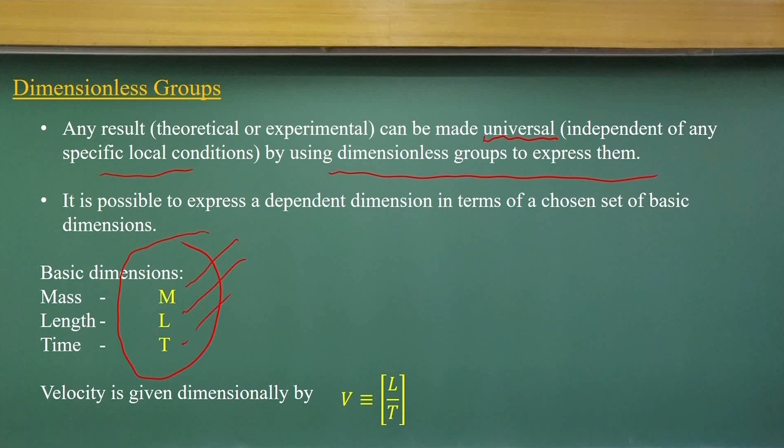Now if you look at the fluid properties, some are related purely to geometric dimensions - length, area and volume. It is just a geometric dimension, so it has units only in terms of length: length is L, area is L square, and volume is L to the power 3. Similarly, velocity is length per unit time, and acceleration follows a similar logic. Let me look at discharge or volumetric flow rate - volume per unit time - that would be L cubed divided by T, which is the volumetric flow rate.

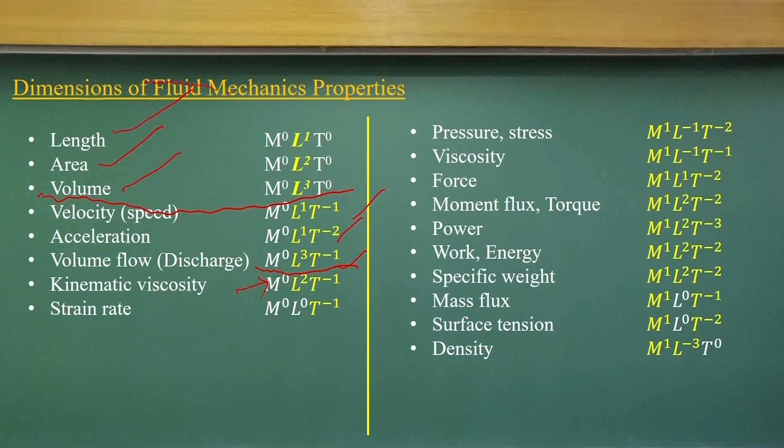Now we come to two different parts. One is kinematic viscosity, as we discussed in Newton's laws of viscosity, which is independent of mass - it has dimensions of length and time. Similarly, the shear strain rate is also independent of mass and length. So if you look at these properties, all are independent of mass. First I start from length, area, volume, then fluid properties like velocity, acceleration, volumetric rate or discharge, kinematic viscosity, and the shear strain rate.

Now look at other properties like pressure, force per unit area, similarly shear force per unit area. Force, as you know, will be mass into acceleration. The pressure and shear will be force per unit area, that is what you can compute.

Similarly you can compute the viscosity dimensions if you know the basic equation of Newton's laws of viscosity. Shear stress is proportional to shear strain rate, and the proportionality constant is the viscosity. So you can compute what could be the dimensions of viscosity.

Similarly, let us move to the next level with momentum flux or torque, and the units for power, work and energy - you can find out what they will be. Then I come to two other properties: specific weight and mass flux, which is mass per unit time.

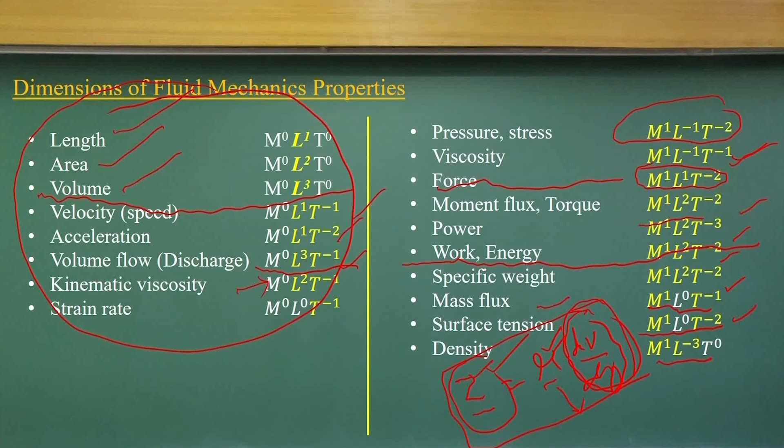If you can get that, substitute the dimensions of the properties like shear stress, velocity gradient and the mu value, then you can get the dimensions of mu. And if you know the relationship between kinematic viscosity and dynamic viscosity, or the basic relationships between fluid properties, you can compute the dimensions of those fluid properties.

So whenever you have problems, first write the dimensions of the fluid properties, and if you know the dimensions, you can easily find the units - for example in terms of kg per meter cube. Mass will be in kg, length in meters or centimeters, and time in seconds, hours, or days - we can have different time frames. So it's a very easy task to derive the dimensions of fluid mechanics properties.

Let us go to the principle of homogeneity. Most equations in engineering - not all, let me repeat, most equations in engineering - are dimensionally homogeneous. That means the dimensions of the equation will be the same on both sides. The left hand side dimensions should match the right hand side dimensions for the equation to be dimensionally homogeneous. This concept of dimensional homogeneity is something we use for designing experiments.

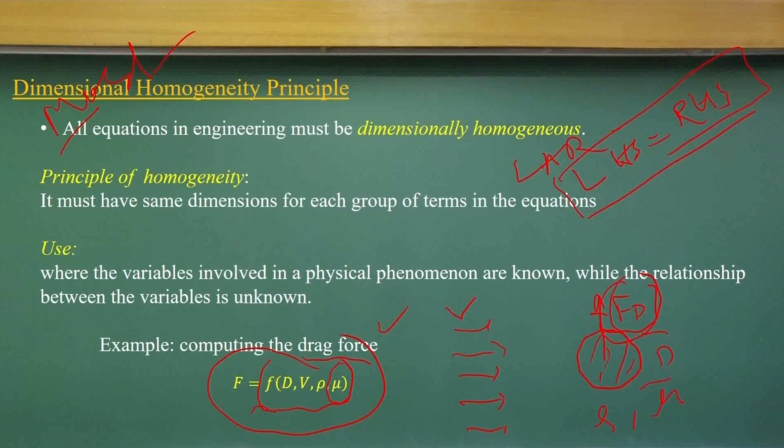How will we do it? There are two ways. First, since F is a function of 4 independent variables, I will do 4 types of experiments. When conducting an experiment, changing D and different V1, V2, V3, I keep rho and mu constant. Similarly, I will change the other parameters, keeping the rest constant.

If I try to get a function this way, I will fix 2 parameters and run a series of experiments, say 10 experiments, to get a curve. For the conditions with independent variables, I will need 10 into 10 into 10 into 10, which comes out to be 10000 experiments.

If it is 10000 experiments, that is too expensive for us. But what we have to look at is whether there is some sort of dimensional relationship between these independent variables and the dependent variable. If they have a dimensional relationship that we can find, we need not do these 10000 experiments; we can do fewer.

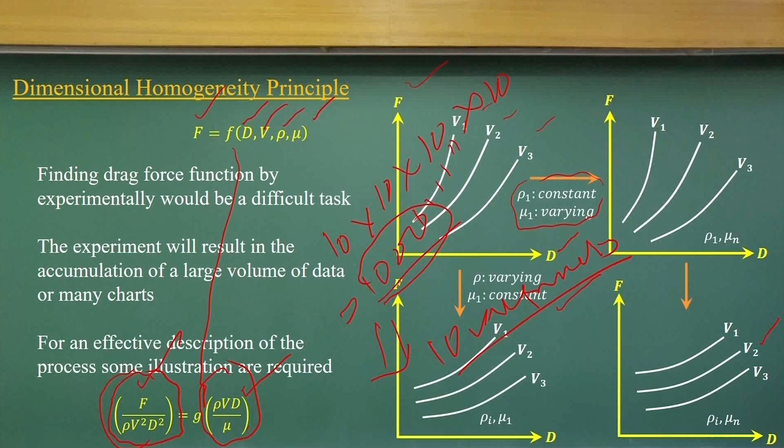So instead of the F function, we are now looking at a g function, a relationship between two non-dimensional groups, one on the left side and one on the right, and we look at different functions. If that is the condition, I should conduct experiments at different Reynolds numbers and get from the experiment what the force will be, non-dimensionalize it as an f1 function, fit a function, and get this data. So only 10 experiments are enough.

As compared to conducting 10000 experiments, the non-dimensional approach lets us make a dimensionless force plot and conduct experiments at different Reynolds numbers. Once you run experiments at different Reynolds numbers, you get the force, you know the velocity, you know the diameter of the cylinder, then you can compute the non-dimensional force component. If you get this curve, it is easy to find the force at different Reynolds numbers. So this dimensionless analysis saves us from doing a large number of experiments.

Second, when you put it in non-dimensional form, it is easy to interpret the data as compared to doing it on an individual basis.

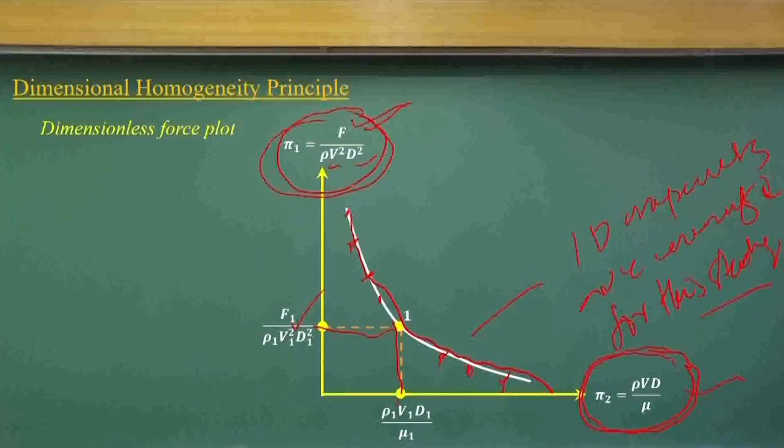The dimensionless plot and this analysis help us save a large number of experiments, as well as help us interpret data in a better way compared to doing individual experiments. Almost all the time, any experimentalist starts designing experiments using dimensional analysis.

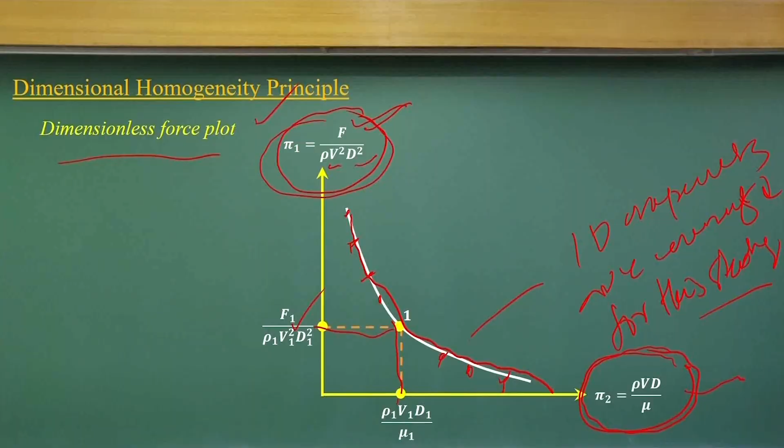It is not only fluid mechanics, but economic models and socio-economic models as well. If you talk about any experiment you conduct, we always do a dimensional analysis to find out how many experiments we should conduct.

Now let us come to how to do that - Buckingham's pi theorem, which is a very simple concept. If you have a number of independent dimensionless groups, how many will I get? If there are n dependent variables, and we know the basic dimensions are 3 - mass, length and time - then we can group it so that the number of non-dimensional groups will be n minus r.

Please remember, the dimensions are usually 3, but not always 3. That is something I want to highlight again - you have to use judgment for that.

If you know that a particular dependent variable has these many associated variables, and if you can visualize what force components and variables are going to play a role, then you do a non-dimensional analysis to find the relationship between dependent and independent variables.

Now let us come to the same problem - drag force on a sphere. It's easy now, same concept in fluid streams, same problem. You have a sphere here, and the flow is coming here like a cricket ball.

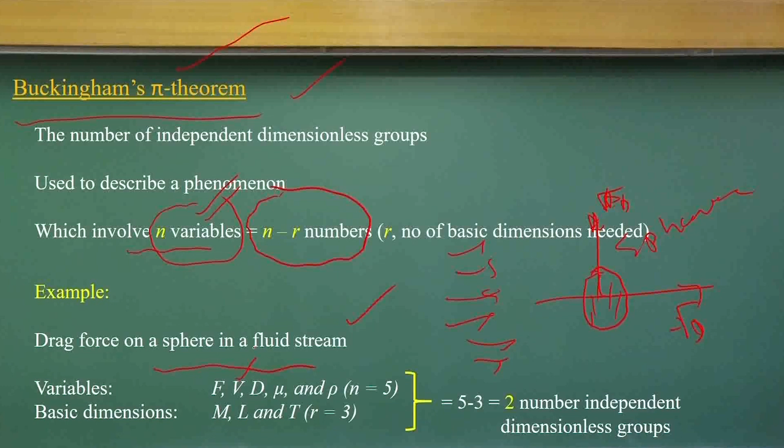If that is the condition, I can visualize that it has a dependency on velocity, the dimensions of this, the diameter of the sphere, and the fluid properties like mu and rho.

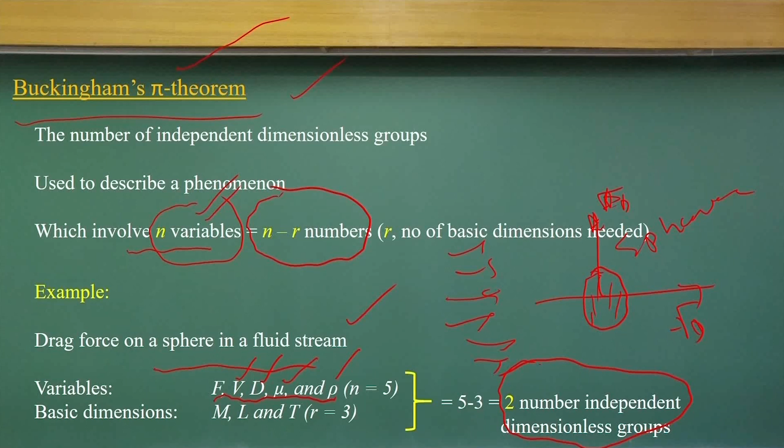So the total number of dependent and independent variables is 5, and basic dimensions are 3. So we can make 2 independent dimensionless groups. Is that correct? It's very easy - we have to find the dependent and independent variables, count them, and since we know the basic dimensions are 3 (mass, length and time), we just subtract to find that we can have 2 independent dimensional groups.

Now I have to develop the dimensional groups. So first, what I have to do is write the dimensions of each one: force, mass into acceleration, the length, velocity, density and dynamic viscosity.

If you do not remember the dimensions of dynamic viscosity, please remember Newton's law of viscosity - you have to remember that one. If you do not remember the dimensions of dynamic viscosity, please remember Newton's law of viscosity. If you remember it, you can easily compute the mu dimensions. That is what always confuses people in any exam.

I want to give you a way to remember all the dimensions of the fluid properties - if you know the basic equations, some of the basic equations, you can easily find out the dimensions of that dependent or independent variable.

Now, if you look at that, this is called the pi theorem. It's a very easy concept - please don't confuse the pi here with pi equals 3.14. That is not it - it's a non-dimensional form, pi.

So for this, I can have 3 variables - that's length, velocity, and rho, and force. These are called the repeating variables. Length, velocity and density - I will put these as repeating variables along with F.

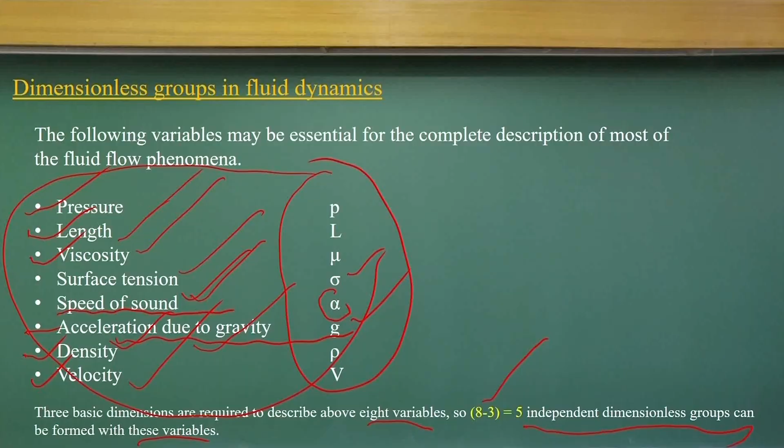Most fluid flow problems - nowadays you do it in very extensive different ways - but most fluid flow problems we can define with these 8 variables. That means we can group them into 5 independent dimensional groups. So what are they? Now I can show you the figures.

I do believe these figures will convey many things which I may not express within this limited time. If you look at what happens when we have fluid flows, different forces act, and different forces dominate under different conditions. When you solve fluid flow problems, we should find out which force is dominant and try to solve for the dominant case.

So that is the way we look at fluid flow problems - to judge which forces are dominating. For example, when you have laminar to turbulent flow, like this case - you can see this laminar to turbulent flow which I discussed in the first class, showing vortex shedding and all - these are the forces that are dominated here.

One is the inertia force, the momentum flux, and another is the viscous component. These two forces are dominated, and the ratio of those two forces is the Reynolds number. You can compute this as rho VL by mu. I'm leaving you to do that exercise, otherwise we will discuss it in your assignment.

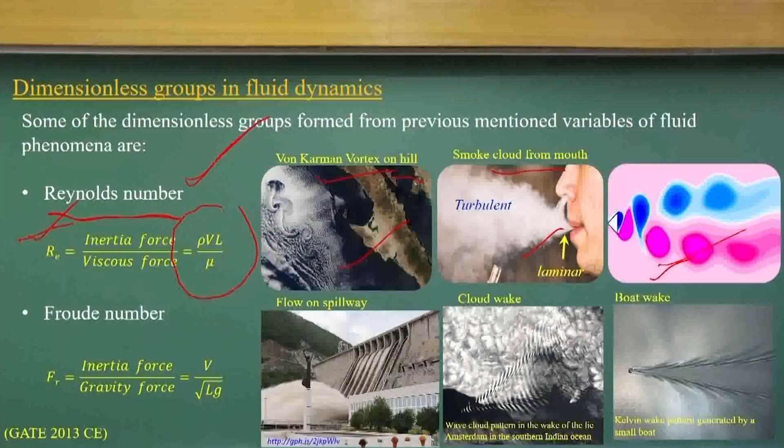In a similar way, if you go for the next number, it's called the Froude number. It depends on the fluid flow where gravity force also has dominancy compared to viscous force. For example, if you talk about this spillway, here the viscous forces are not that dominant; the gravity force works dominant at sea level. So we can have a ratio between inertia force and gravity force. That's what flow Froude number is. That's how we define it, as a non-dimensional form.

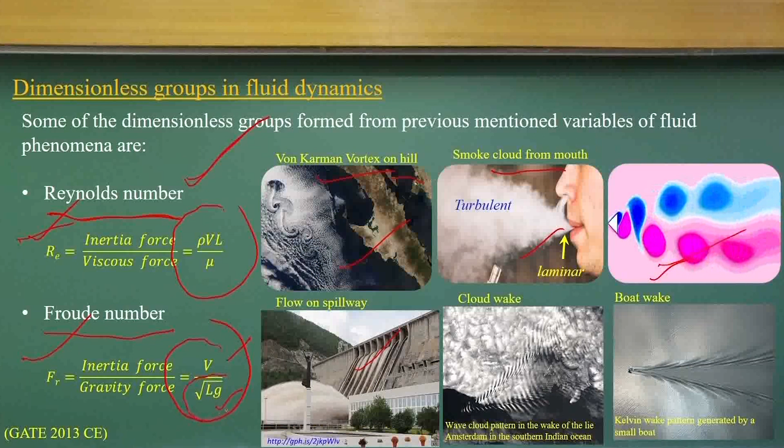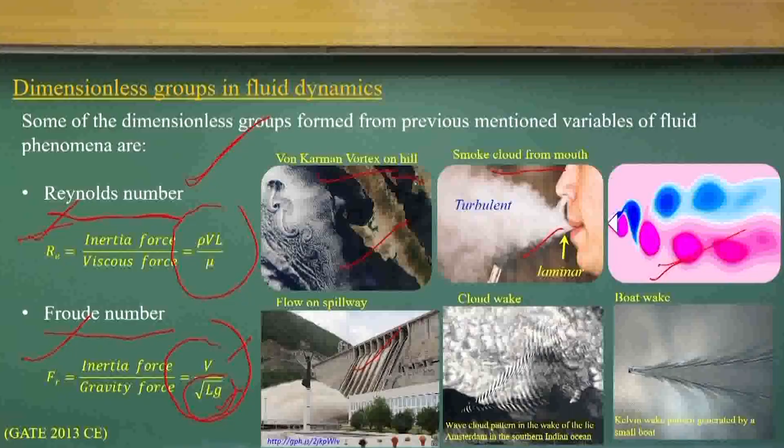If you look at this, it's velocity over length into g, square root, also having the unit dimensions of velocity, so it becomes non-dimensional. How to get this component, I think in these basic lectures I cannot fully complete the wave celerity concept here, but I will cover it in higher classes. If you go for postgraduate studies or open channel flow, definitely you'll know how this square root of Lg comes as a gravity force component.

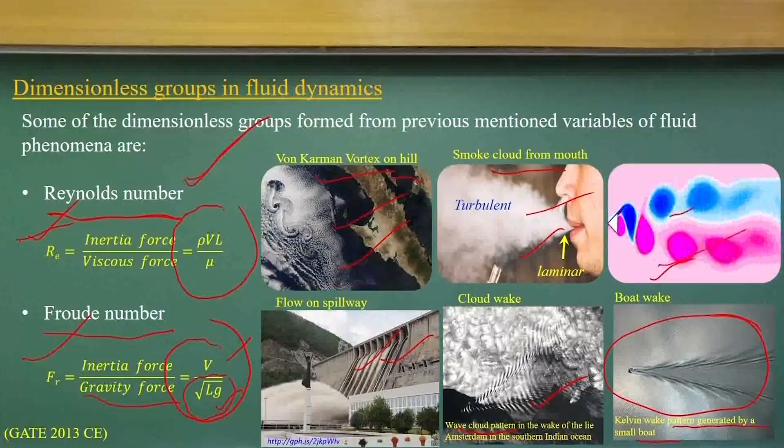The same process happens with wave cloud patterns, and also in the wave pattern generated by a small boat. You can look at these figures; it's very interesting, you can see all sorts of flow dominancy. The top lines show flow dominancy of inertia force, which drives the flow, versus viscous force; in this case, inertia force versus gravity force. I just repeat, please remember these two numbers because they are very common: Reynolds number and flow Froude number.

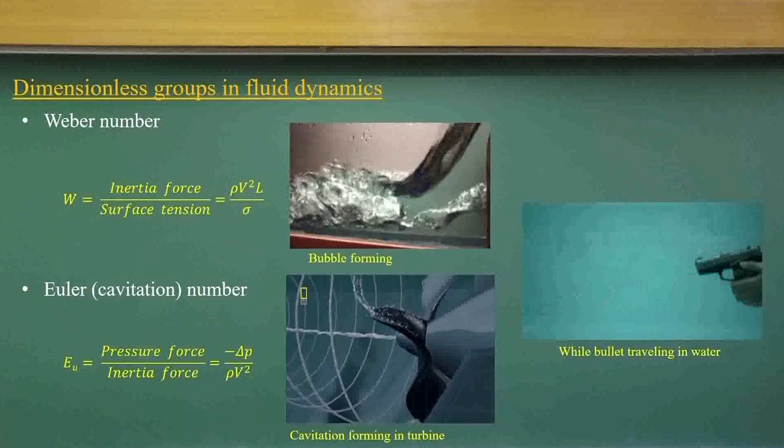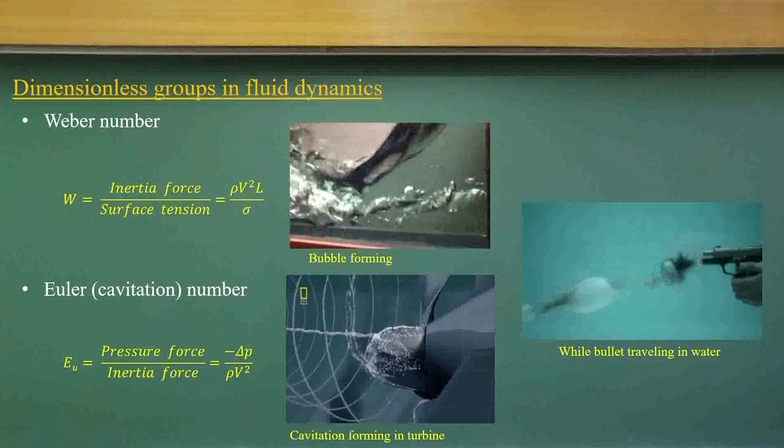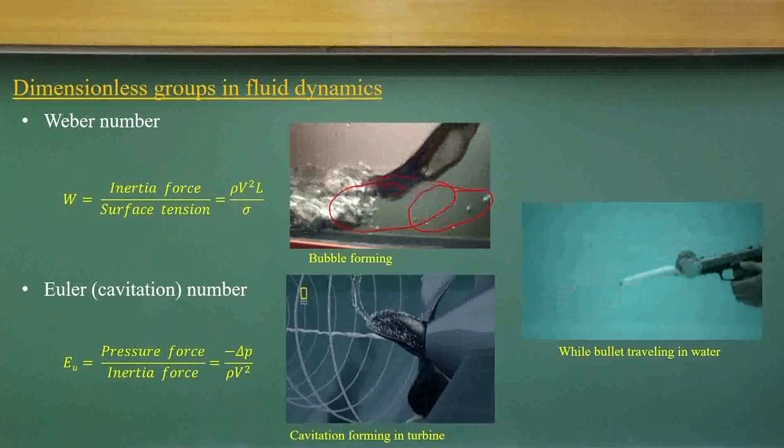Now if you look at the other two numbers, not used as often, but nowadays at the level of fluid mechanics problems we are solving, we look at these forms too. One is where surface tension dominancy is there, like these bubble formations, which are because of surface tension force. So if I focus on these bubble formations, I should look at the Weber number, which represents a ratio between inertia force and surface tension force. That's the component we are getting.

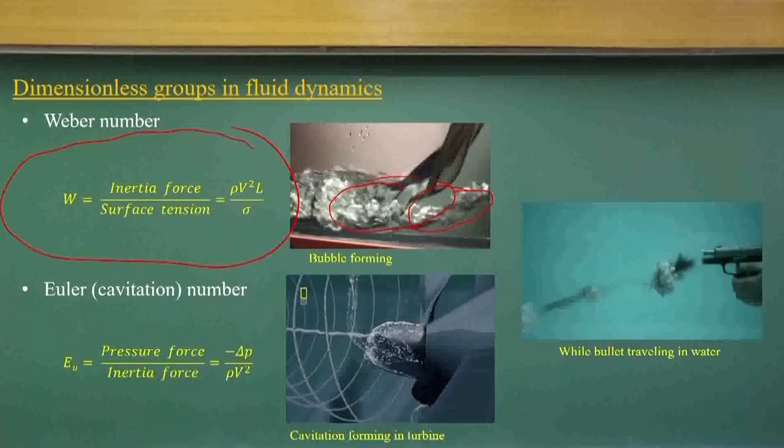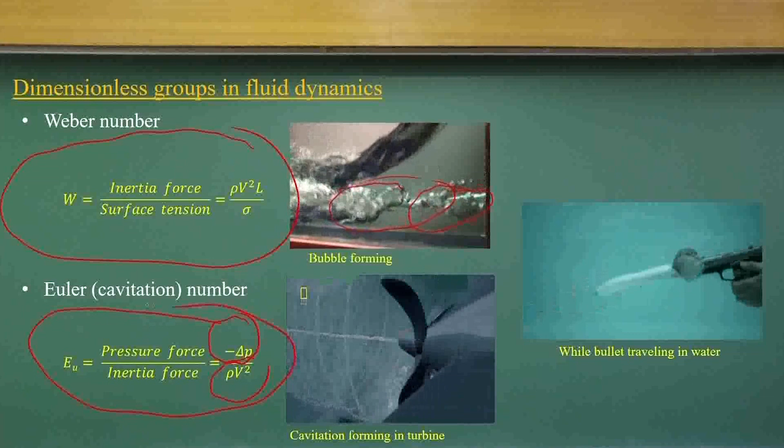But you know, cavitation occurs when the pressure drops to certain levels, then water vapor forms, which we discussed in the basic lecture 2. So what happens is we try to look at how much pressure drops, which generates the cavitation process. Pressure drops, the change in pressure—if there's more change in pressure, there is a greater likelihood of cavitation force, divided by the inertia forces, which is defined as Euler number or cavitation number. In this Euler number, the inertia force is in the denominator, as compared to the other numbers.

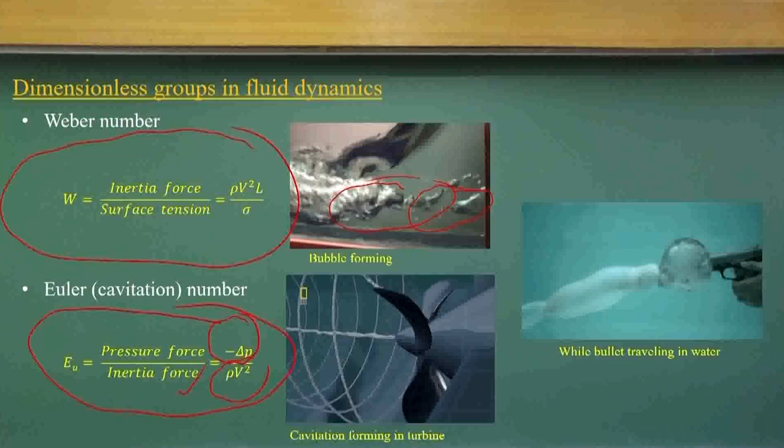So we have four numbers with us: Reynolds number, flow Froude number, Weber number, and Euler number or cavitation number, which happens when a turbine is moving. We can see there is a chance of cavitation formation near the turbine blade. But there are conditions where both things are dominant, like surface tension and cavitation, which happens. It's a very interesting topic: if a bullet travels in water, surface tension as well as pressure drops create the cavitation process. We can see bubble formations and also the collapsing of bubbles as the bullet travels.

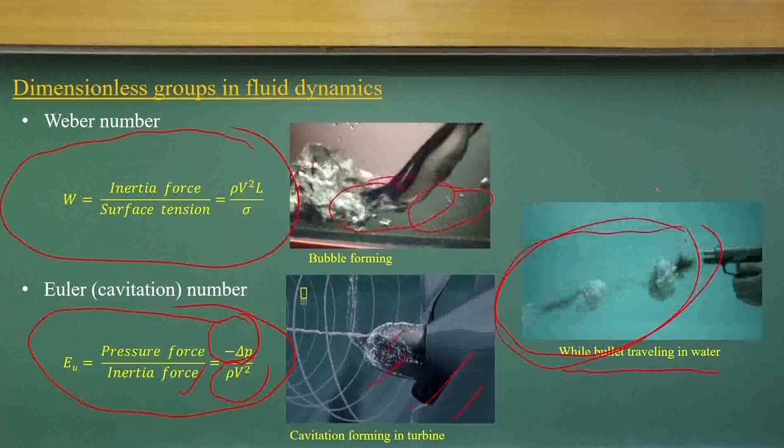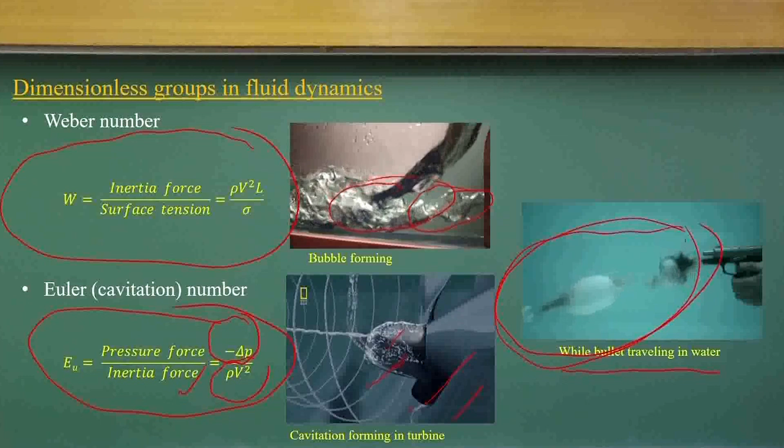This is because inertia force dominance is there, surface tension dominance is there, and also there is dominance of the pressure force drop which generates the cavitation process. That's the way water vapor formations occur, and those vapors are collapsing. You can see that process, it's very interesting—just firing a bullet in water. That means two processes are happening in dominance with respect to inertia forces. Now if you look at two other components, there's the Mach number, flow speed by sound speed.

This number becomes 1 when the flow speed is equal to the speed of sound. If you look at the Mach number of Boeing 737's flight, it's around 0.785, which is subsonic flow. But if you talk about the fighter jet SR-71 Blackbird, the Mach number is 3.35.

That means the flow velocity of this fighter jet is larger than the speed of sound. This is not the case for your domestic flight, but fighter planes achieve that, so you need different technology for it. If you're interested, just Google the flow field for fighter jets versus the flow field for Boeing 737s. So these are two different Mach numbers, and the flow pattern changes.

The compressibility changes too. In both cases here compressibility matters, because when Mach number is more than 0.3, we talk about compressibility. So in both cases we have flow compressibility. This way we can know, with respect to Mach numbers, the flow speed and sound speed relationship, which you'll study more in advanced aerodynamics, so we can know what range it is.

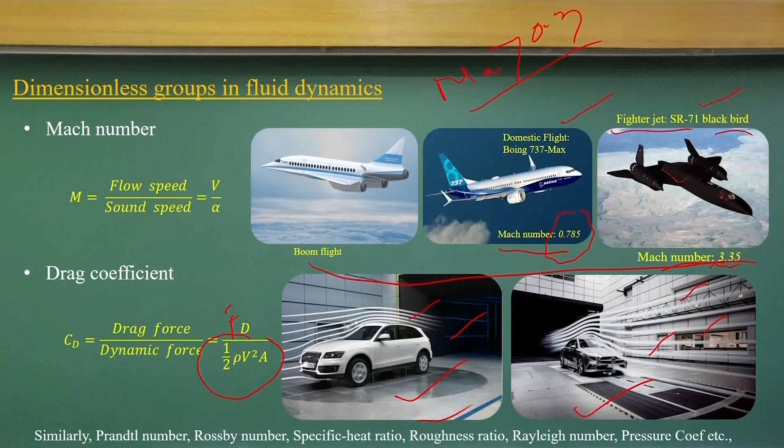So this is designed for speeds of more than 200 km per hour. That's the reason even if there's a cyclone, we cannot have rolling. But what has happened to the bus? It has not been designed for 200 km per hour. So that's the reason you can see the rolling of the bus in cyclone situations.

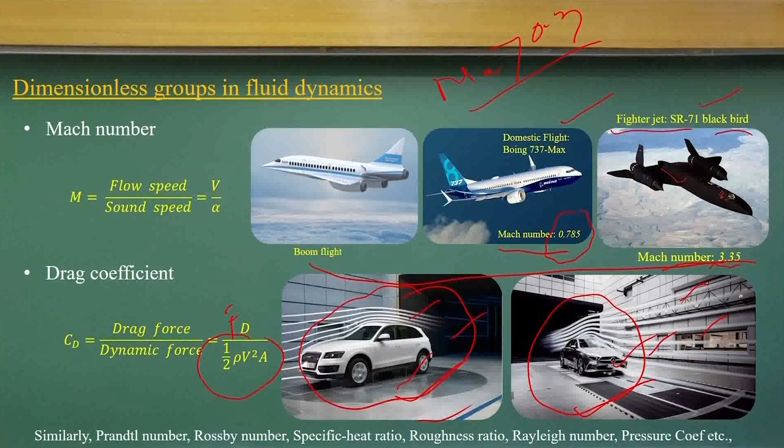But that will not happen in case of a well-designed car, because these are all designed for high speeds. The design velocity itself is close to 200 km per hour. So we will not have the rolling condition we've seen with buses in cyclones, because the car is well tested at the prototype level.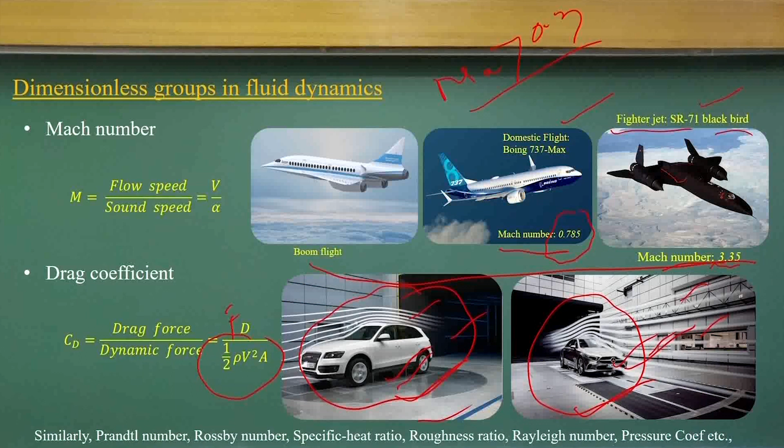It's not at the model level, it's at the prototype level, to find out the drag force. Based on the drag force, all the components are designed - where the weight should be, where the lightweight parts will be, whether many passengers are sitting inside or not, all conditions are tested to find the safest design, so that even at extreme design conditions of speed up to 200 km per hour, it will not result in rolling conditions like we saw with the bus in cyclonic winds.

So let's come to the closure of this. Before that, let's have 2 or 3 examples which are very easy. I will not repeat much.

Let's find an independent dimensional group using Q, which is the volumetric discharge, as a function of R (radius), dynamic viscosity, and the pressure gradient. We know the dimensions - mass, length and time - for discharge, R, mu, and dP/dx. Remember this is dP by dx, meaning the pressure dimension divided by the length dimension gives the dP/dx dimension.

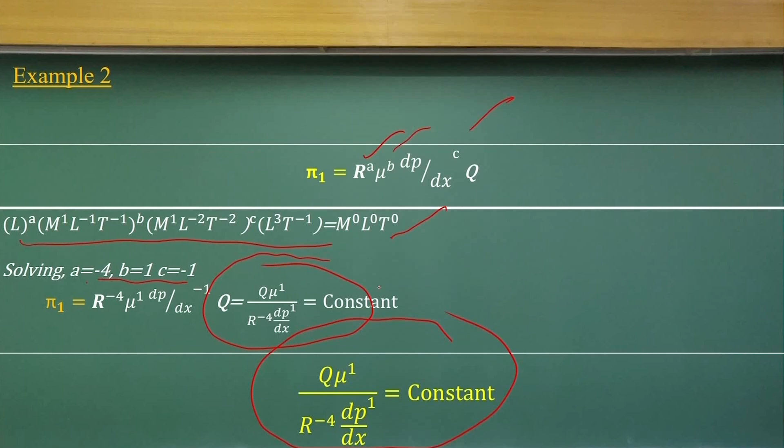Once we know these dimensions, we know it will form one independent dimensional group - we'll follow the same concept, I won't repeat it here. Again you substitute the power exponents a, b, c, equate with the non-dimensional pi value, and you'll get the relationship between these four variables forming a non-dimensional group. This is a simple example, but the first thing is we should remember the dimensions of the fluid variables.

This is another example where the basic difference is that we have a dimensional groups involving conditions which are not a fluid flow problem. We have variables: E value, P, length, and deflection. So you have length dimensions, pressure dimensions, length, and E value. In this case, when you have this type of condition, you have mass involved.

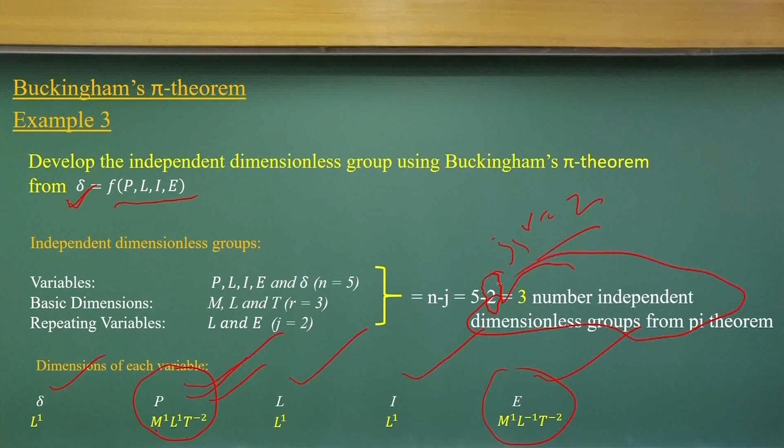So we cannot combine three variables to make it non-dimensional. Only two variables can be considered to make a non-dimensional form. So instead of 3 we use 2, because the third variable cannot be combined since only these two variables here have dimensions where mass is involved. So you will consider j equal to r equal to 2, and you will make 3 independent dimensional groups from the pi theorem. That is the difference.

Now if you look at these tables, we have pi 1, pi 2, pi 3, with 2 repeating variables and 3 non-repeating variables. Substitute all these values, solve it, get the values A, B, and finally we get a relationship.

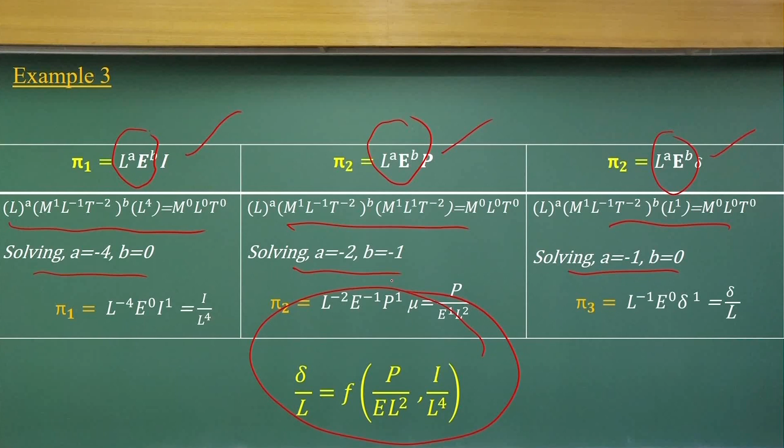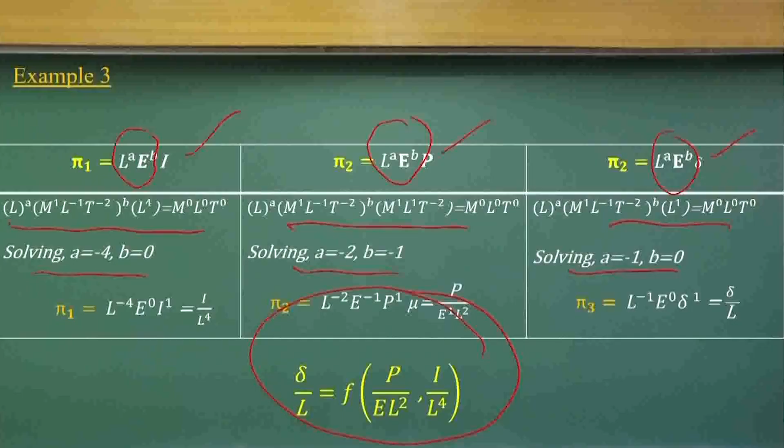If you are good in solid mechanics, you can interpret what these are. It's very easy to interpret this part because you can know what they are. It's not very difficult. This is moment of inertia, and you can interpret what these deflection values and all are.

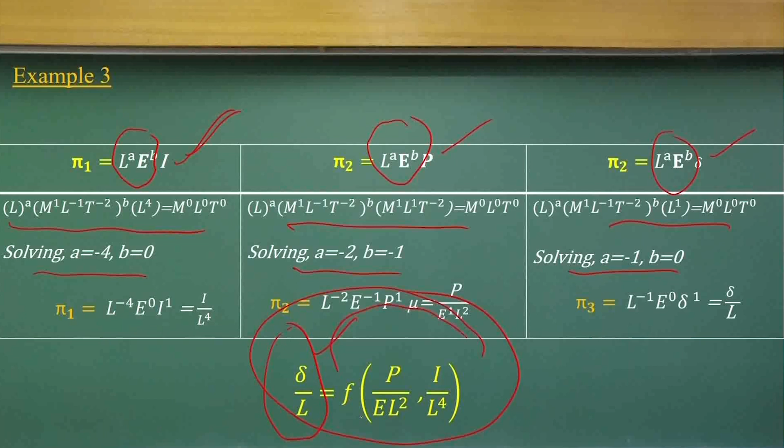So what I want you to take is that we do not do this dimensional analysis only for fluid mechanics — for any experiment we do this dimensional analysis to know the relationship between dependent variables and independent variables in dimensionless formats. With this, let us close these lectures.

Before this, I think today we have the advantage to fly from one place to another by aircraft, and this is possible because of two really adventurous people in the world. In the early 20th century, they tried to do something just by looking at nature. If you are really interested, just Google the Wright brothers, and you can know how they struggled in their life, how many failures they faced before they succeeded. Their first plane succeeded with 59 seconds in the air over a distance of 852 feet, and because of their success, now we have aircraft, because human beings felt it was easy to fly.

But how did they achieve that success? They were not that well educated, but they had an adventurous spirit. They had a series of failures. They left their country, came to another country, and during that period, Europe's top universities were also trying to develop something like this. Top professors in Germany and other European countries were trying, but nobody had the type of advantage that they had.

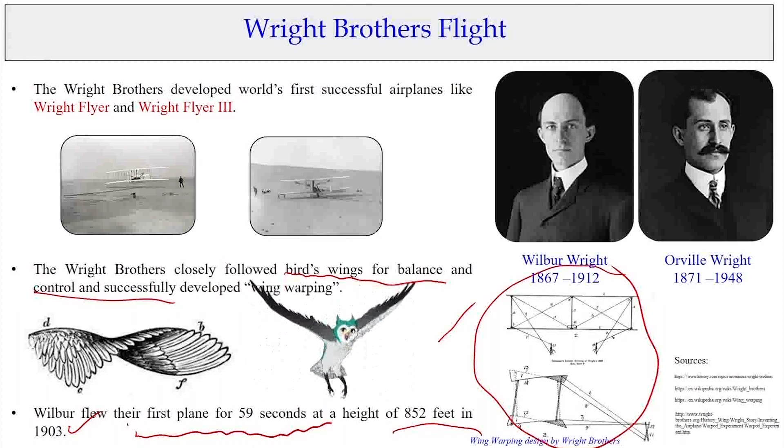So what do I want to tell you with this? When you do experiments, you should expect failures, but all the failures sometimes make a success story — that's what these people proved. All these failures give us an opportunity to think about why we have failures. One thing they did was follow the bird's wing for balance and control, which is necessary to fly. Just by looking at the bird, what is called wing warping, that's what they designed, which no university professor could do. That is the spirit — adventurous spirit makes the world in different forms, not just basic knowledge, because you try, you fail, you learn, and that learning spirit creates things nobody has invented before.

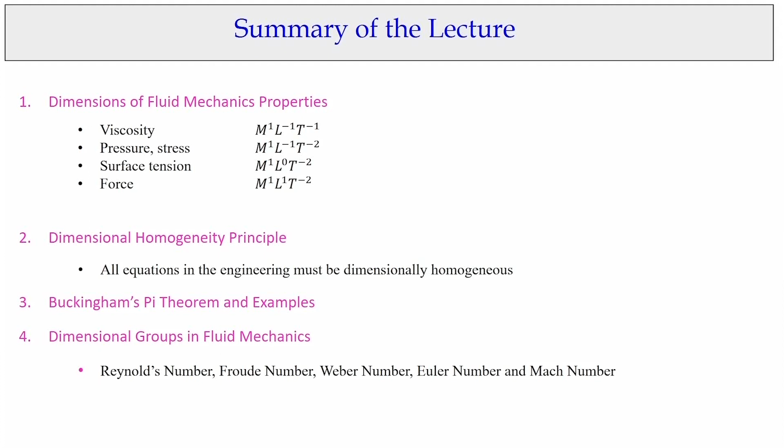So with great salute to these two brothers, let's conclude these lectures. Now you know what dimensions are, what the dimensional homogeneity principle is, and what dimensional groups are in fluid mechanics. We will repeat these things in the next class. With this, I thank you for your attention in this class.